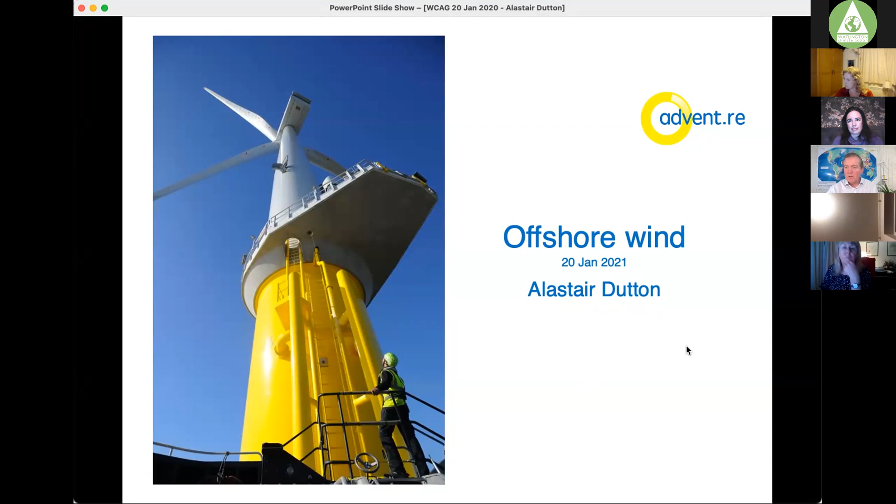Now I'm going to try and be clever here and play a video, which I haven't done on Zoom before. Let's see how it works. I've got a feeling I'm going to have to switch my share.

Where'd it come? There it is. And then if I maximize that.

So here's an offshore wind farm connected to shore, and we'll just skip through this a little bit. So I'll start at the beginning. This is just to show the construction of an offshore wind farm, sponsored by Siemens, because it's their turbines. So I'll talk over this rather than play you their music.

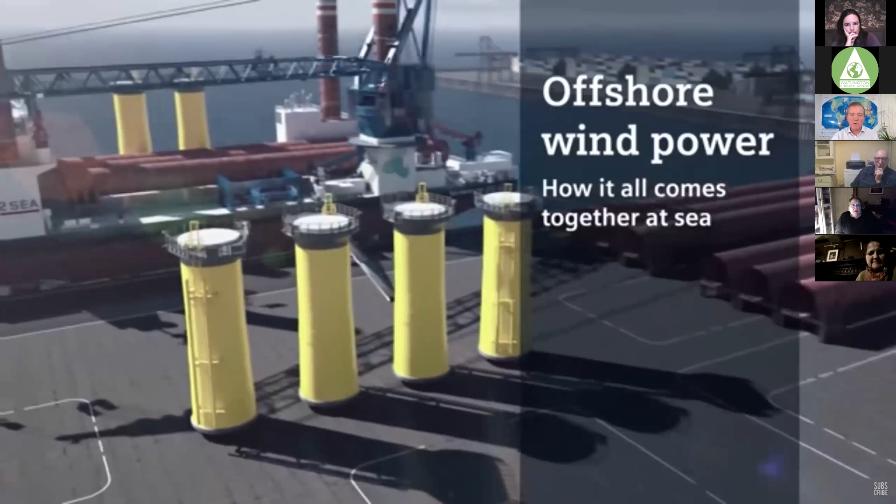So we're at the construction port. These are very large ports. Here is a transition piece being lifted onto the vessel. Those brown tubes are the monopiles, which will be driven into the seabed to make the turbine stable. And then the vessel goes out, as you can see.

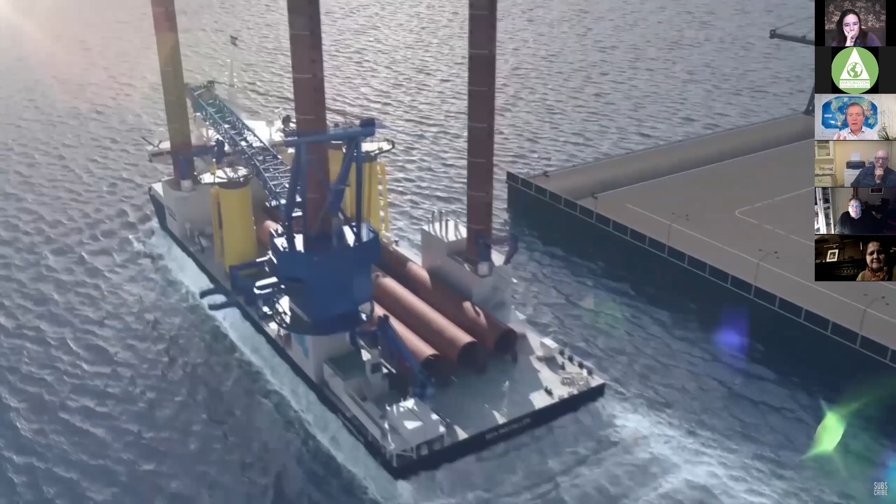Now don't be confused by the brown tubes sticking up, the four. You'll see what happens to those in a moment. In fact, here we are. So we're now at the site, and the whole vessel lifts itself out of the water, so it's a nice stable platform to hammer the monopiles into the seabed.

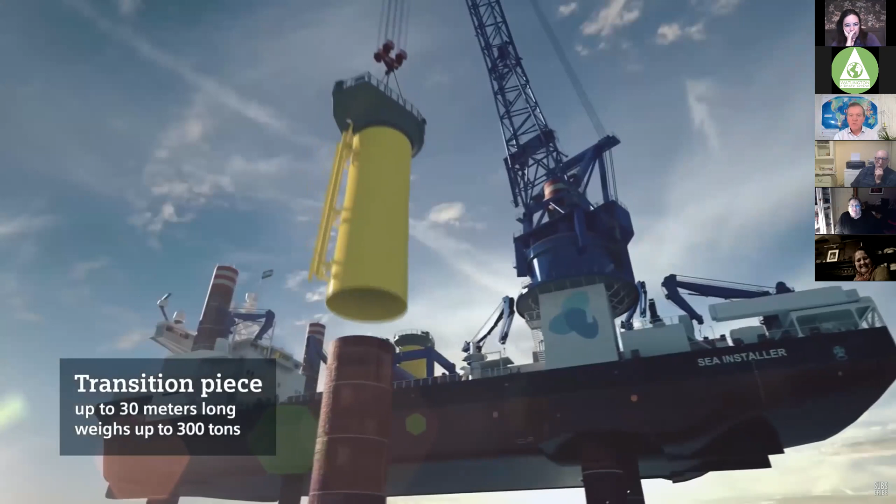This is all happening at fast speed, it takes a bit longer than this. So the transition piece is a bit like the cap on a pen, and it's just a nice preparation for the turbine.

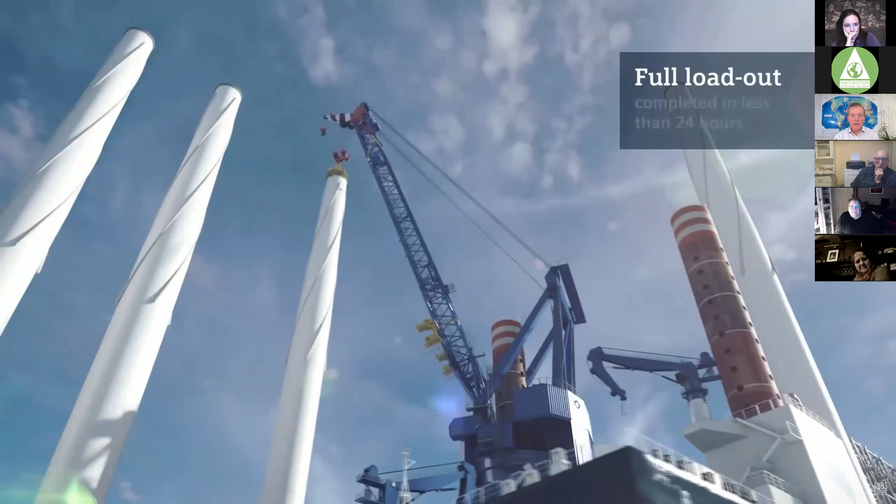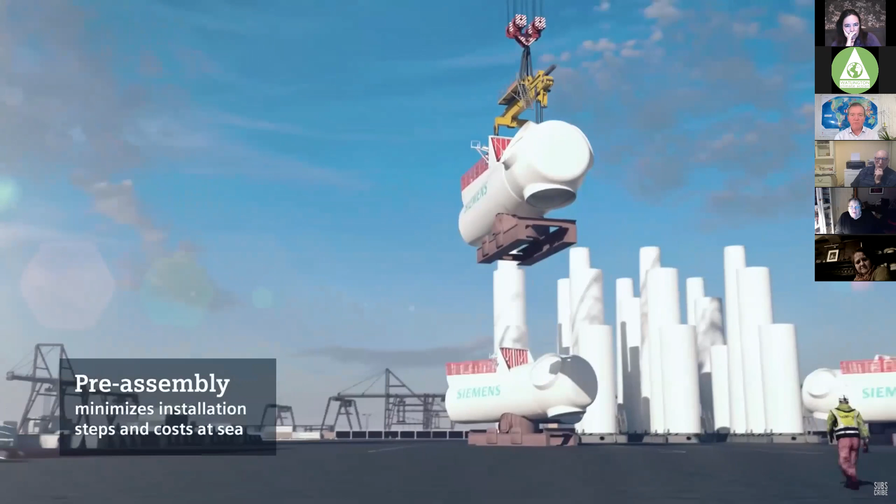And off they go to do some more foundations. We call these fixed foundations. Then either the same vessel or another vessel goes to collect the turbine pieces. You're trying to have the minimum number of lifts offshore, because every lift creates some risk. Onshore, you do it in a more modular fashion.

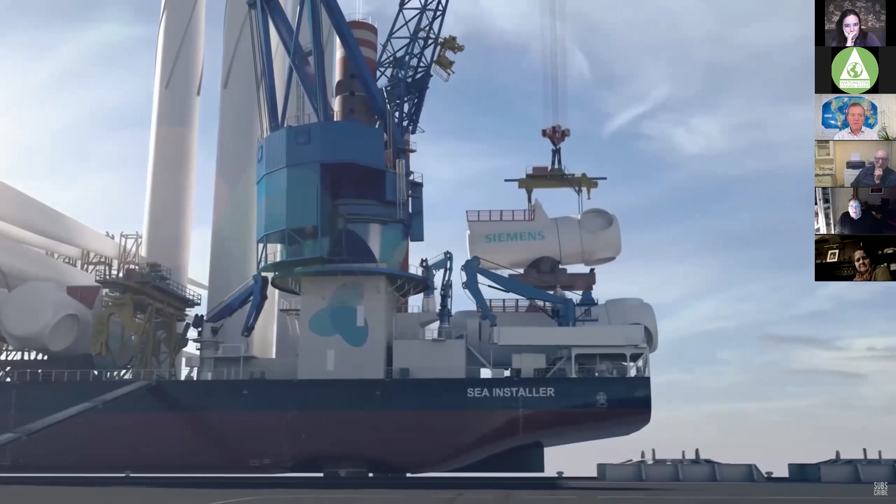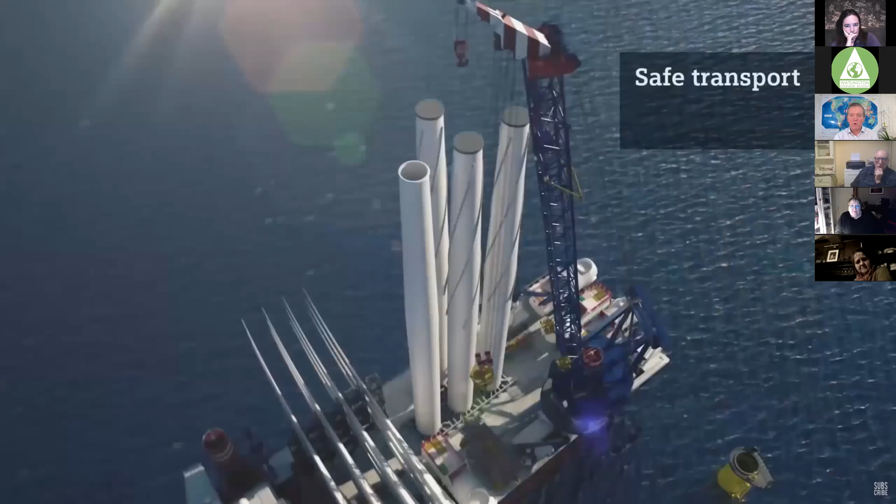And they're just lifting the nacelles into place, and that contains the generator. You can see the blades have also been put onto the vessel, and same thing, it lifts itself out of the water, and then using some special clasps you can start to lift these components out. Now that tower is probably about 120 meters high.

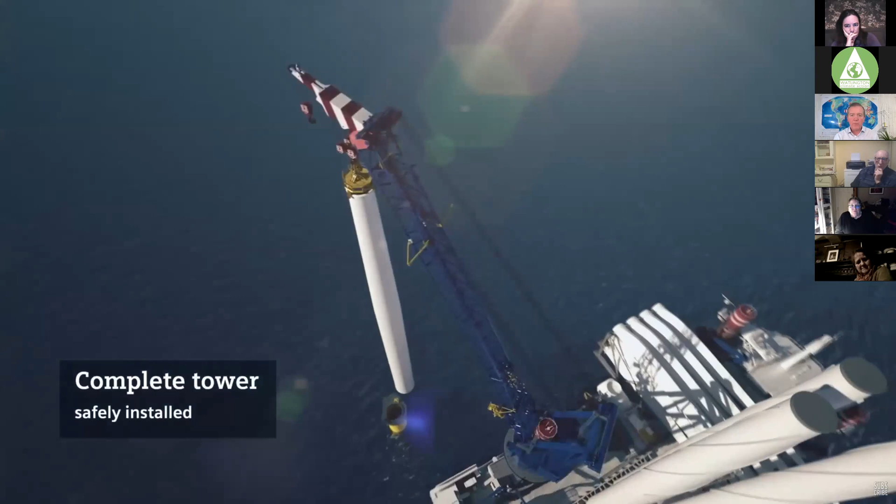And this takes great skill, given that we're offshore and the weather can be quite nasty. In fact, one of the big issues is when do you go offshore or whether you stay in port. We'll pick that up a little bit on the operation side as well.

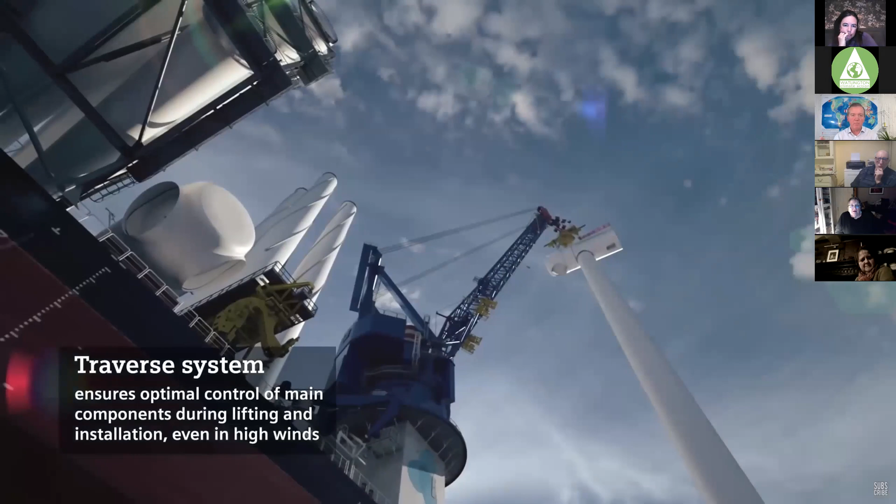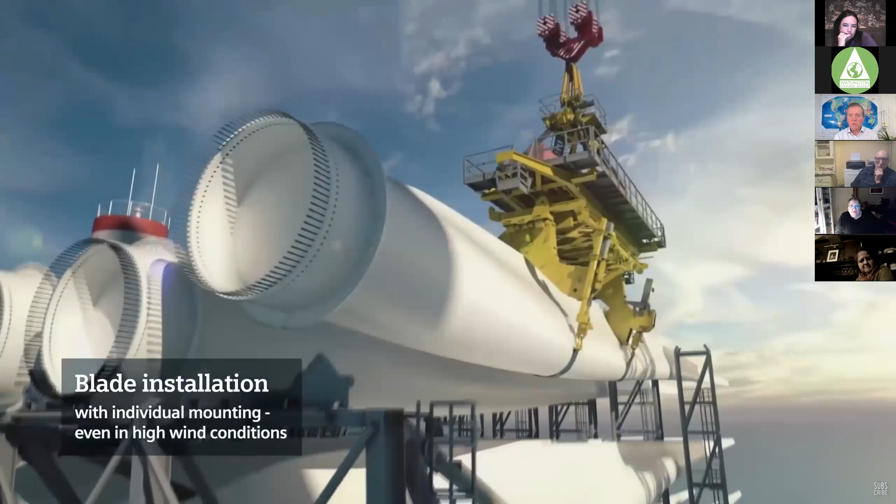So they lift the nacelle into place. There are people now bolting that in, it doesn't just sit there. There's an awful lot of bolts, I think 4,000 or something, in a classic construction like this. And then similarly, a special connection to lift the blades into place.

And bear in mind, you put offshore wind farms where it's windy. This is actually incredibly reliable, you can do this installation even when it's very windy, because of the techniques that people have now adopted.

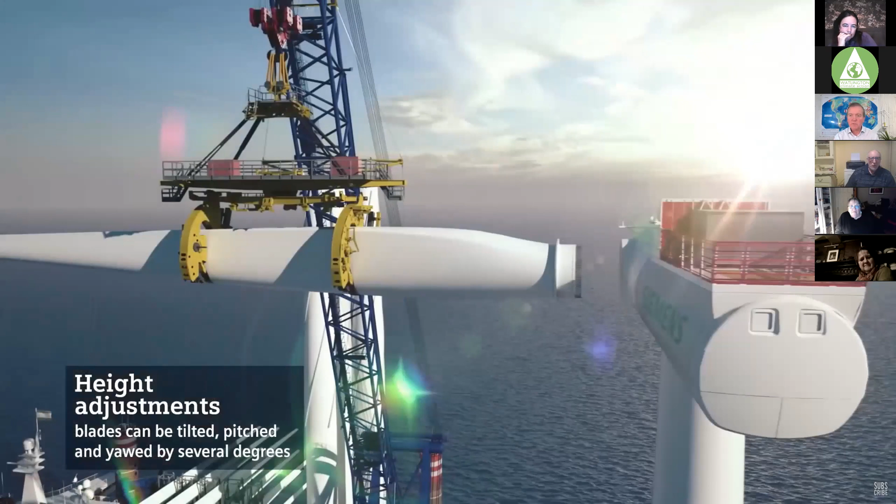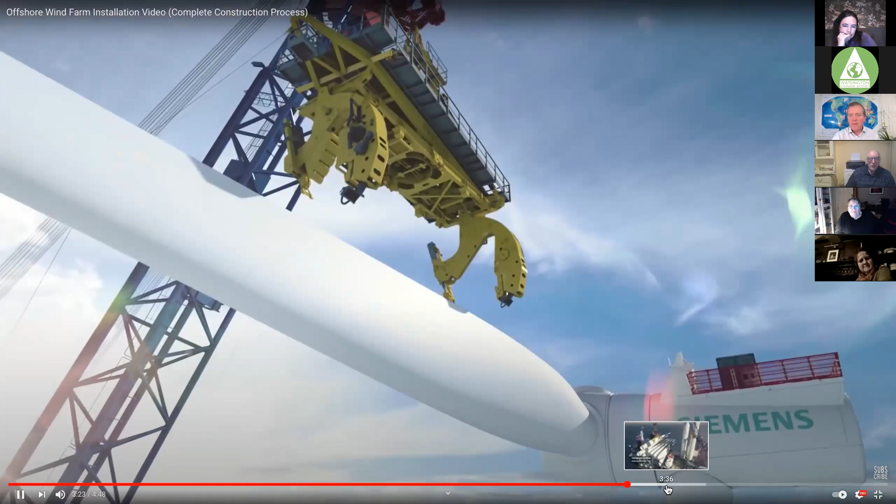And there is a motor in the turbines to allow you to move round. And also, if there is no wind, you would turn the turbine just a little every now and then to stop the bearings getting flattened or getting flat edges. And there you go, you've got yourself an offshore wind farm.

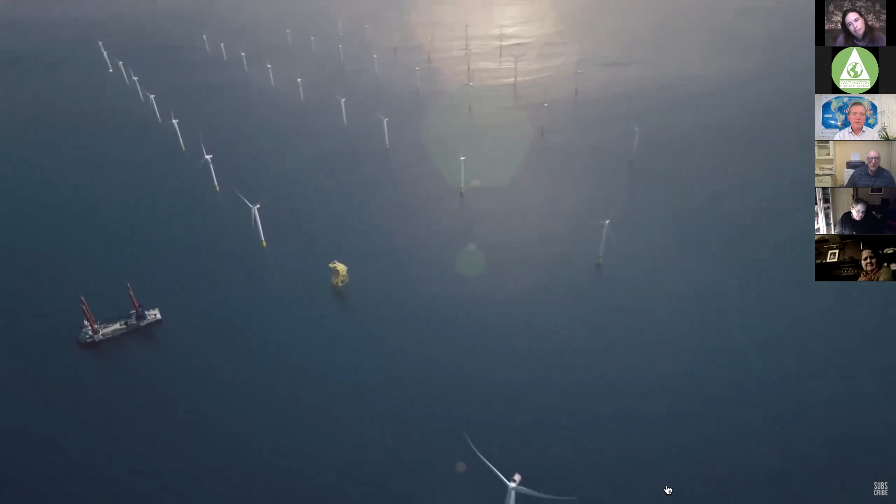In a moment, it'll show you how the cables are connected. One substation. So then the separate turbines are connected in what's called strings of cables that are then connected to the substation, where the voltage is lifted before sending to shore and then connected into the grid itself.

Right, enough of that. See if I can get myself back to the presentation. There we are.

So why offshore wind? It's like other forms of mining, you want to go to the mother lode, the best version of it. And offshore, the wind is stronger, it's straighter. And since power is related to the cube of the wind speed, that's exactly where you want to be. Lots more power, you can build at much larger scale. We'll touch on that again.

And much larger turbines, so we're seeing projects now, I've mentioned 300 to 1500 megawatts. We ought to touch on what's a megawatt. So a kilowatt would be, if you remember, a 1 bar electric fire. And then a megawatt is 1,000 kilowatts. And we'll mention gigawatts in a moment, which is 1,000 megawatts. Lots.

The other thing is that whilst they're larger, you get 25 to 35%, compared with PV, which in the UK is only 11%.

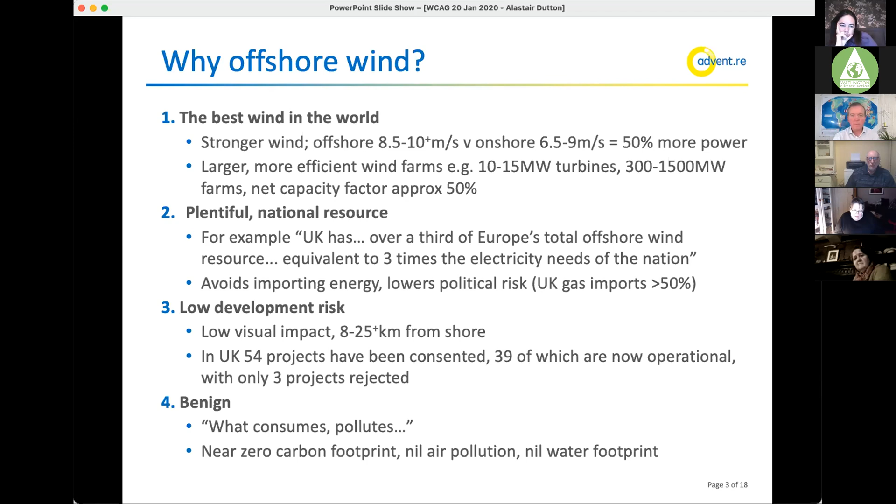In the early days, it was expensive - we have to accept that. But that has come down, as you can see from the numbers there. So it's a third of what it was a little while back. These dates are the installation dates. In fact, the latest auction, back end of 2019 - bear in mind this is dollars - we're now down at £40 per megawatt hour, which is below the cost of wholesale electricity. It's below the cost of new build gas, and it's a third of the price of nuclear. So offshore wind becomes quite compelling at that stage.

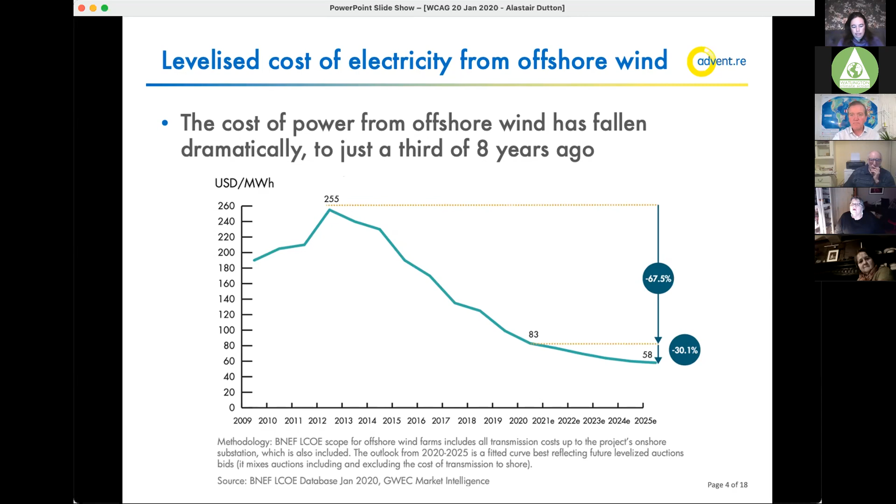My focus is now taking offshore wind global because I think it's the right time. That's where I've been lucky enough to advise, as Andrea says, a number of governments. Europe was the right place to start - great wind, shallow waters. Now there's big growth in Asia. China's moving rapidly as it does. The US has been a bit slow, but it's going to move well this decade. And now we're talking with Latin America, India, and at some stage a bit more with Australasia.

I should say on here, the bright red areas are where the wind speed is pretty good for offshore wind and fixed foundations. The pink areas are where you'd put floating foundations, so beyond 50 meters water depth up to about 250. If you add that all together, that is a huge resource. Only a proportion would get built, but we're talking about well over 1,000 gigawatts. These are huge numbers.

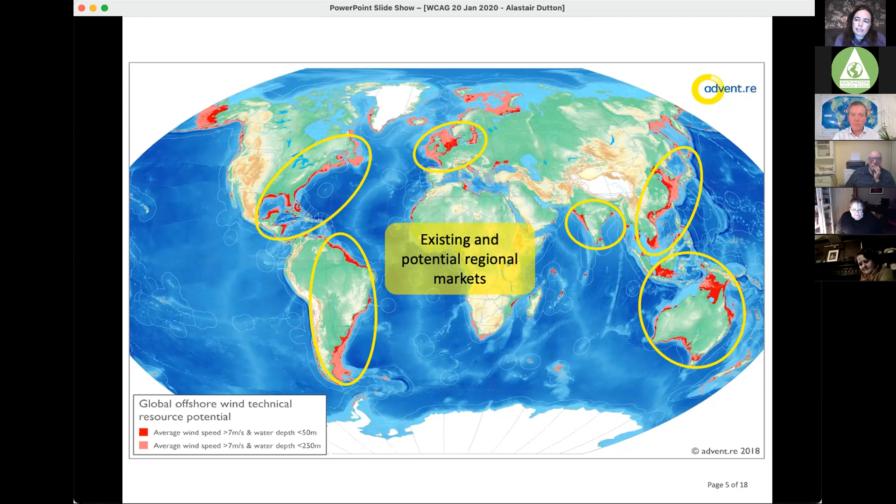So where we've got to date as a global market - I started off at the left-hand side of the graph, it was very much a niche market at that time. Then Denmark started the very first project. Then the UK started to move, and the UK has been a leader and still is, because we've had such a stable policy that goes with this. You can see how Europe has built out, and more recently the graph goes up quite rapidly, bringing in China, as I mentioned. So we're at about 30 gigawatts at the moment, and the UK is a little over a third of that, which is pretty impressive.

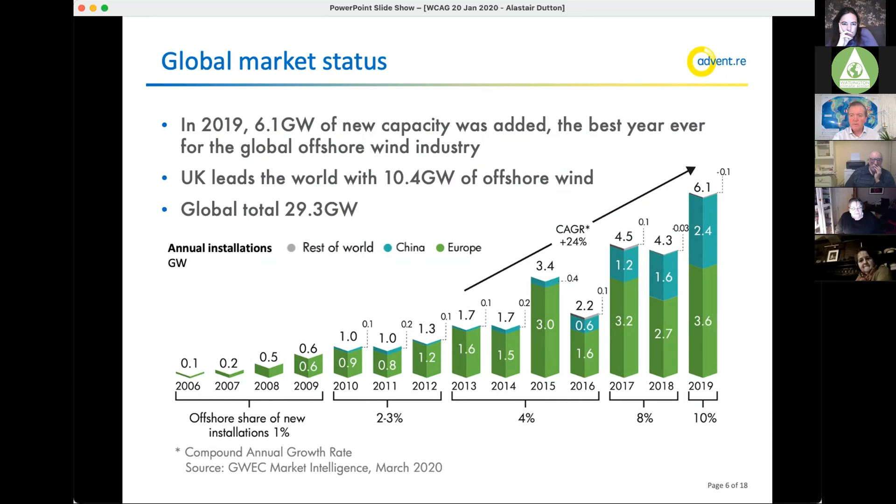This is a graphic that Lindsay, my twin sister, brought to me, and she's online, so you can ask her questions about it. But essentially, people ask about what's the energy payback. Obviously, fossil fuels are inefficient, whether it's in a power station or in a petrol car - there's lots of heat wastage. However, with wind, you will get it paying back in 6 to 9 months, and therefore everything after that is energy benefit. That's what this graphic is showing.

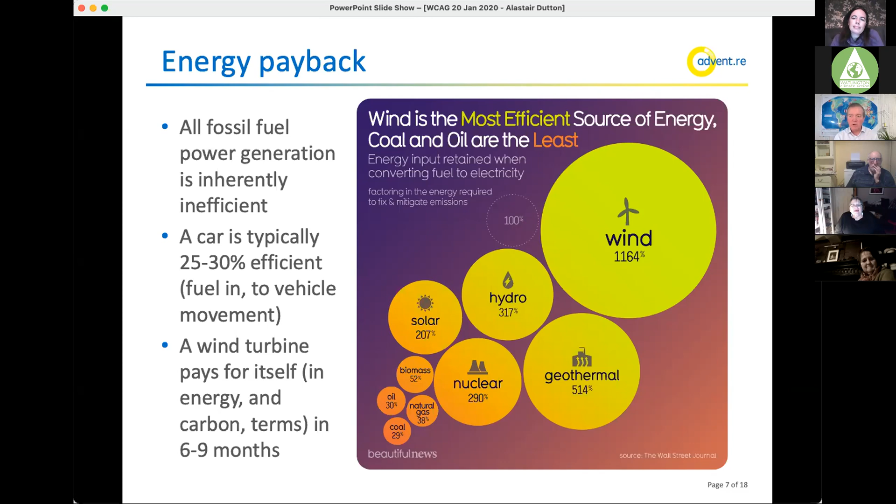I was asked to pick up a few other topics that people like to ask, and one of them is: don't turbines kill birds? Yes, but not as much as an awful lot of other things. Cats, if any of you have cats, may know that they like killing birds, although they tend to be the small birds. A lot of birds crash into windows - we have a garden room that I'm talking to you from now, and sadly 2 birds have died this year by crashing into our windows. We need to do something to stop that. But also vehicles and various other things. So for every 1 turbine collision death with a bird, you've got 8,700 killed by other means. None of them are good, but just to get over the relative issue - that's not wind industry data, that's taken from the US Fish and Wildlife Service.

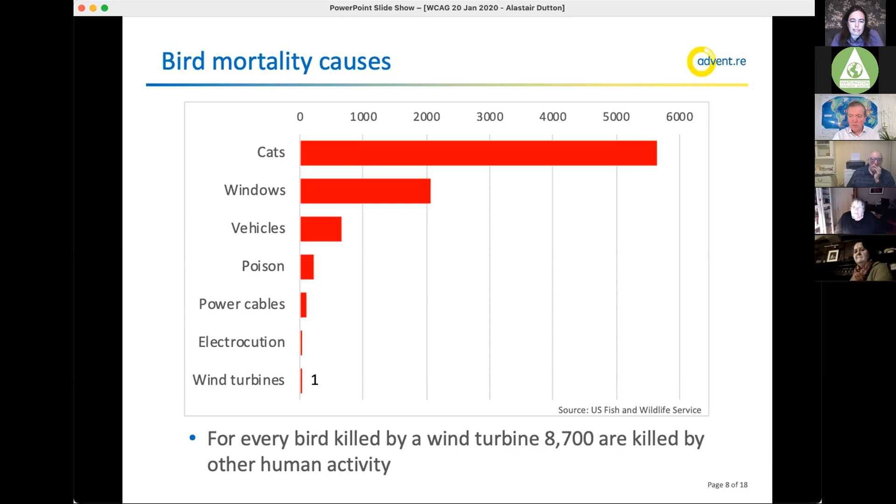Then the size of the turbines. Many of you will have seen the windmill at Lacey Green, which is on the left-hand side, from the early projects.

Sorry, Alastair, you've stopped sharing your presentation. Oh, I managed that. What did I click? Thank you for stopping me. I must have clicked something. Try that. You're back. Thank you, okay.

So the size of turbines has dramatically changed from the beginning. The very first onshore turbines were built on farms, and in fact, one of probably the leading turbine manufacturers many years ago used to make tractors. Now they only make wind turbines.

You can see the scale of those increasing over time. Onshore, the largest turbines are perhaps 4 megawatts. That's still pretty big, it's the London Eye in scale. But offshore you can build a lot bigger. Part of the reason onshore turbines are smaller is you've got to get them somewhere by road or by rail, whereas taking things by sea, it doesn't really matter how big it is.

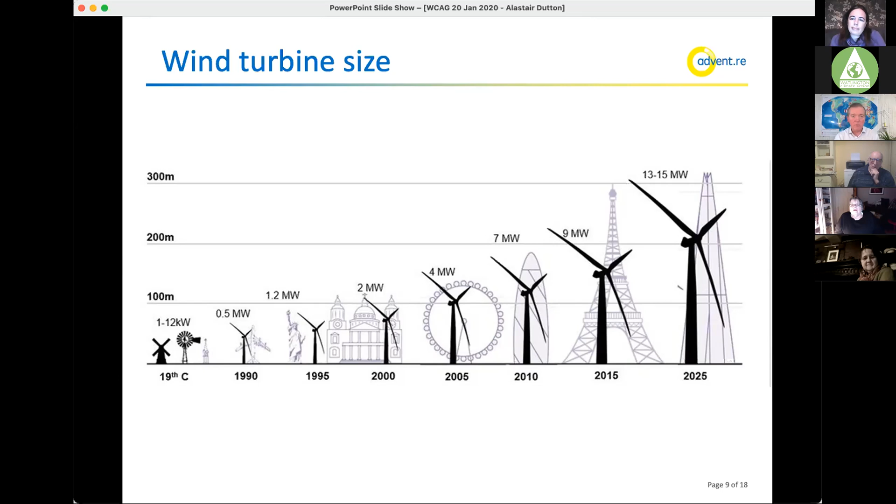The size of the turbine, so the length of the blade to the power output, is a square relationship. So twice the size of turbine gives 4 times the amount of power. The ones on the right-hand side are the ones being ordered at the moment, and we will go bigger—there are designs to do that.

Just to explain how you put your wind farm in the right place, because part of the reason it doesn't kill birds is you don't build them where birds are.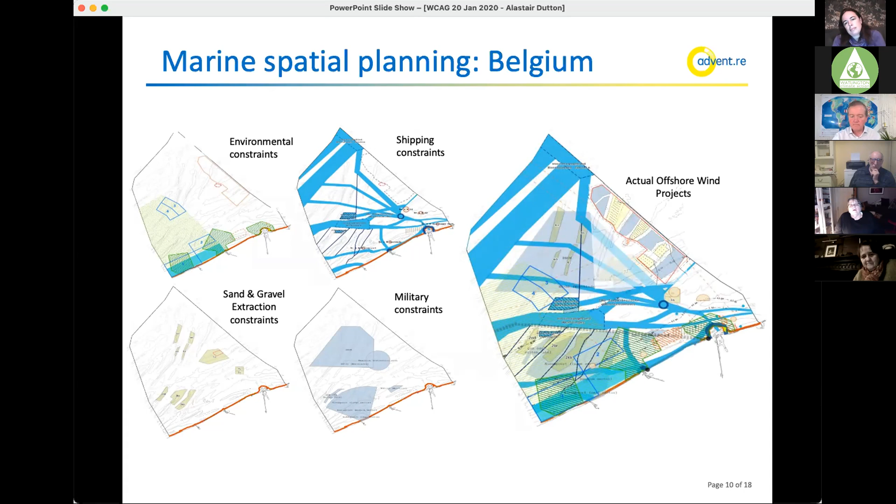I'm going to attempt to do another video if that's all right. We'll have a look at—a lot of people are concerned about how marine mammals react—excuse me a moment, this is great fun having to switch between things. I will just move that back.

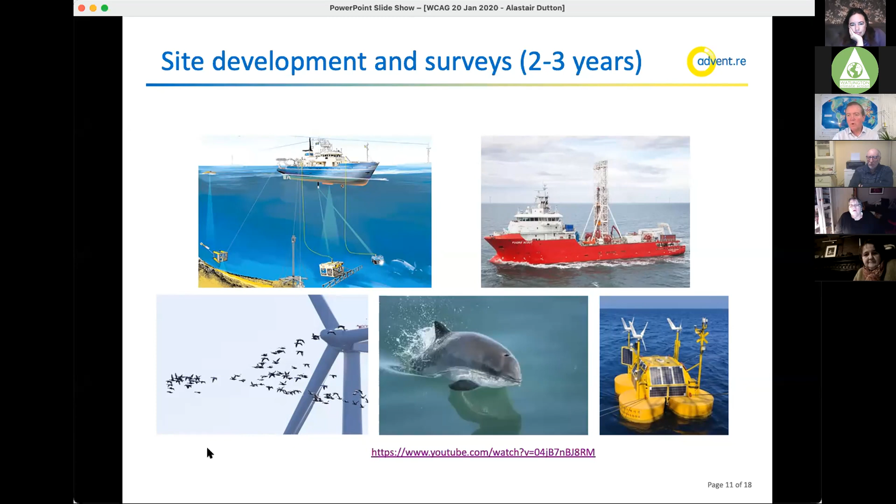All of that information would go into an environmental impact assessment. That gives you your consent. If it's approved, then you need to finance the project and you can move into construction and commissioning. And we're getting faster and faster at this, which makes for better economics as well.

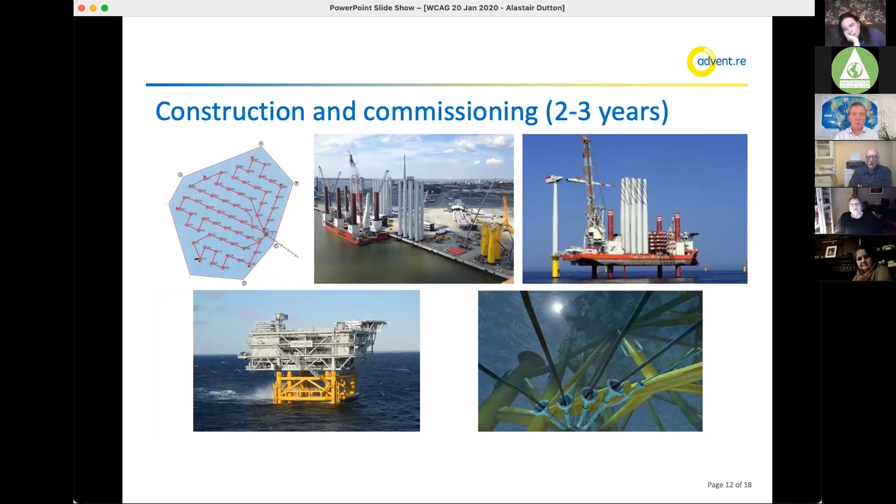In the middle, you've got the construction port we saw earlier. You've got the jack-up barge on the top right-hand corner, the substation bottom left, and then lots of cables. The cabling is one of the most critical parts of the project, often misunderstood.

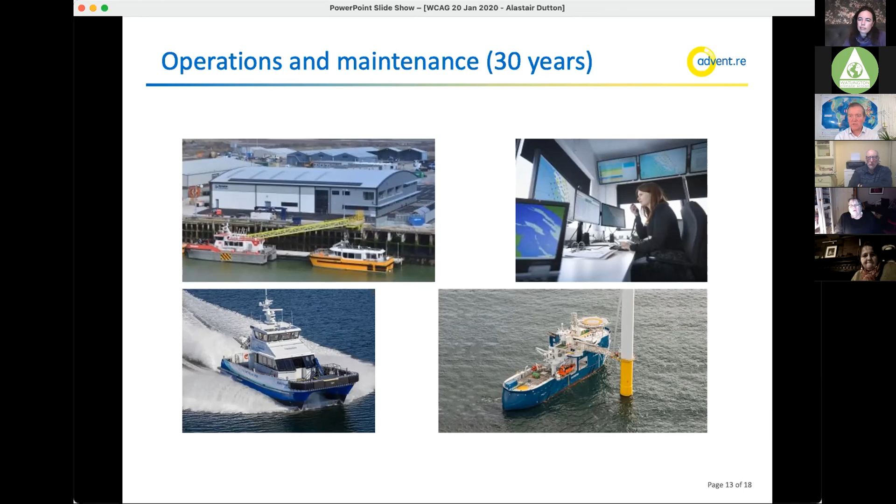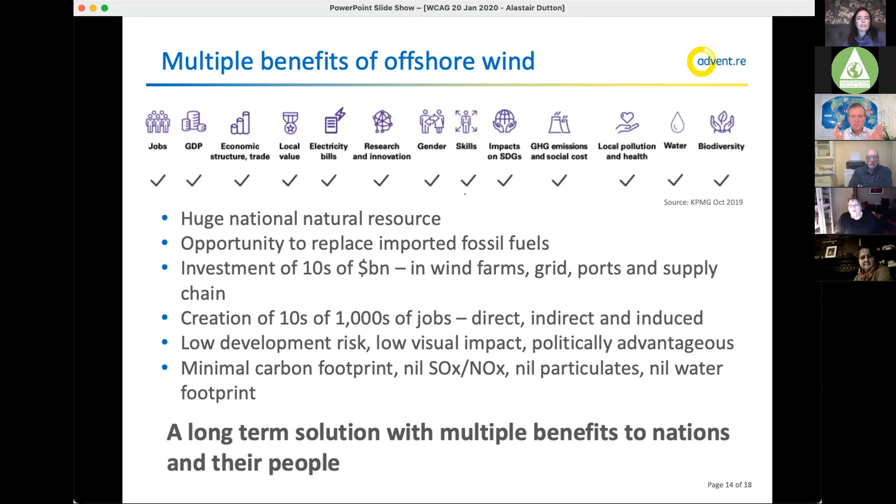But it's not just about cheap power. Offshore wind and a number of renewables bring multiple benefits. I won't go through all of the ones along the top, but particularly attractive to countries is the economic benefit of new jobs and inward investment. And we're talking huge quantities. So an offshore wind farm, let's say 500 megawatts, which is not big these days, that's $1.5 billion. That brings with it a lot of jobs.

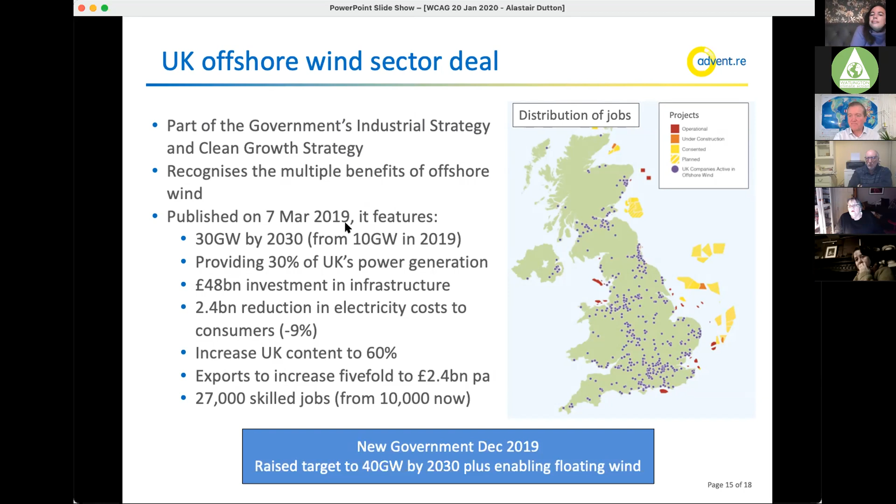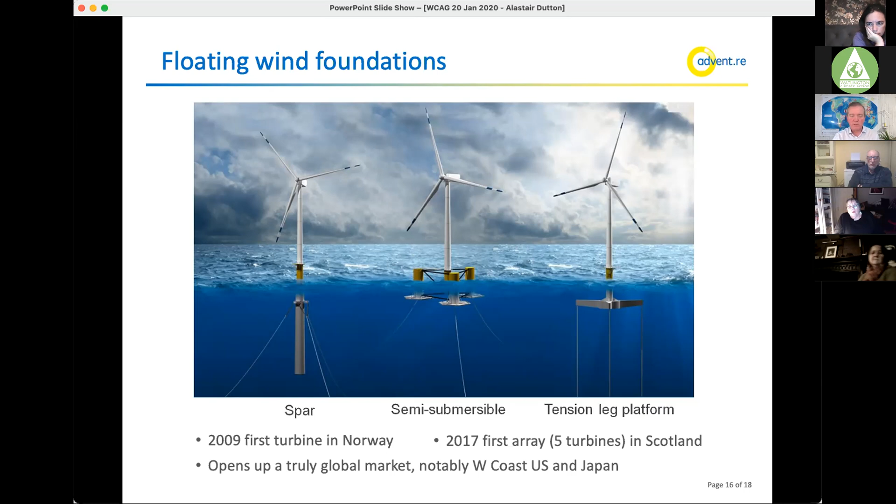And I'm drawing to a close, you'll be pleased to hear. This is what we think is going to happen over this decade.

But next decade, it gets even more exciting, so hold on to your hats. Offshore wind is moving very fast. And, as I say, UK leads and therefore is able to export a lot of its knowledge and equipment.

So I moved through that at speed because I was asked to, but we now move to questions and answers on offshore wind. And then I believe you'd like a discussion about what can I do in the space of climate action. I'm happy to talk to that as well.